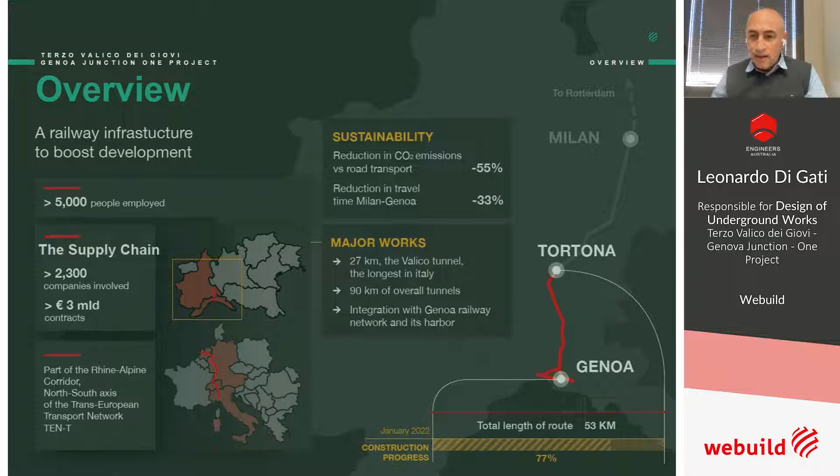So let's focus a bit more closely into the project. As I was saying before, Terzo Valico is a high-speed, high-capacity railway line. It's the one colored in red in the map on the right, on the bottom, and basically it's the last part, the last piece of a larger line, which goes all the way up from Italy to Switzerland, Germany, and finally Netherlands. This part of the railway line is 53 kilometers long, but it has been built mostly underground. You can count almost 90 kilometers of tunnels.

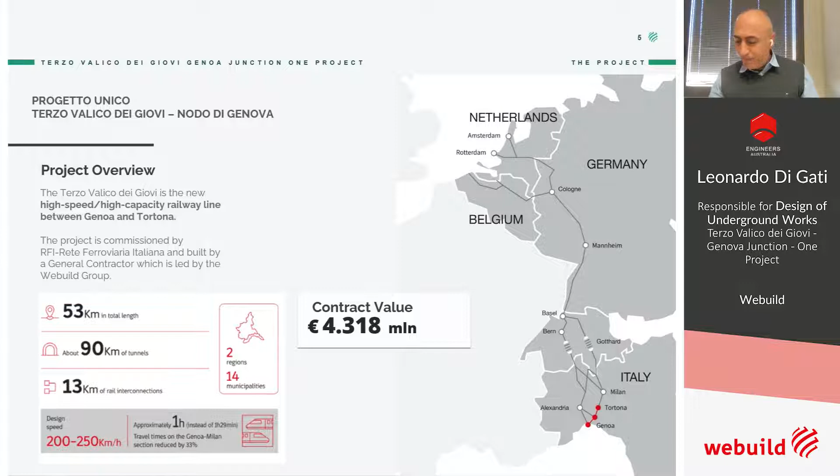Contract value 4.3 billion euro. As we will see, we are general contractor in terms of Webuild. And another important data is the design speed, which is, since it's also high velocity, is 250 kilometers per hour. That will mean that when the line is finished, one can reach Milan from Genoa in an hour. Today it's an hour and a half. So it's quite a saving of time.

This is the current route of goods that go from China and eastern countries to Northern Europe. What's basically happening today is that container ships, most of them, prefer to go the long way, all the way up to Rotterdam through the Gibraltar Channel, instead of going to Genoa. So they go all the way up, and then come down again by train to bring the goods to those countries. Which is quite strange, because it's a longer trip with 5 days of delay in travel time and a bigger cost.

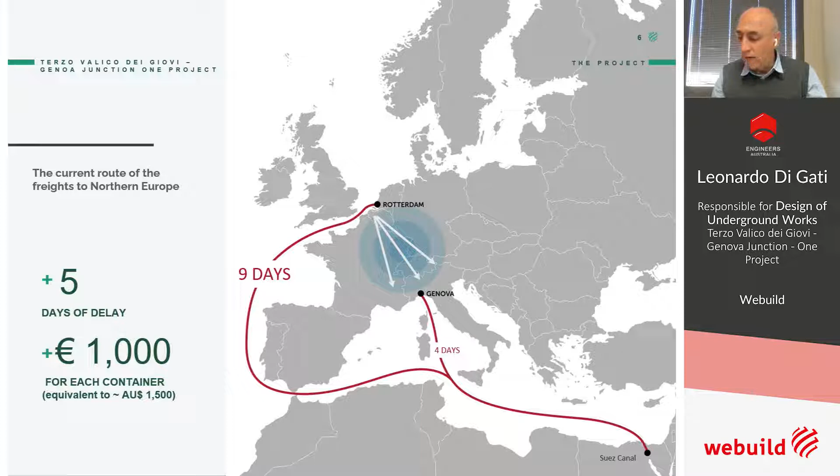It's still a pretty big port, one of the top 10 biggest ports in Europe, but it still has some limitations. This is why the Terzo Valico project is quite important. Also, because today most of the containers are loaded onto trucks and moved through roads, the idea is to transfer all of this onto trains.

The line is part of a larger system called the Rhine-Alpine corridor, one of the corridors of the TEN-T network. Completion of the line will have many benefits, of course, in terms of environment - a huge save in travel time and in CO2 emissions, compared to maritime transport, minus 70%.

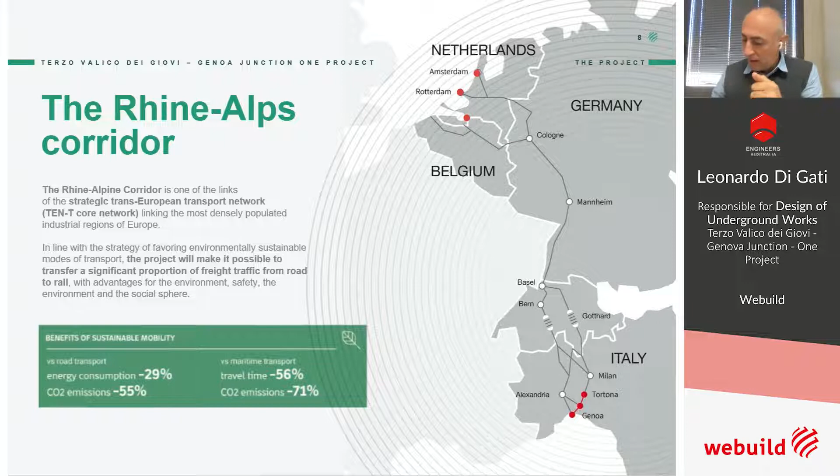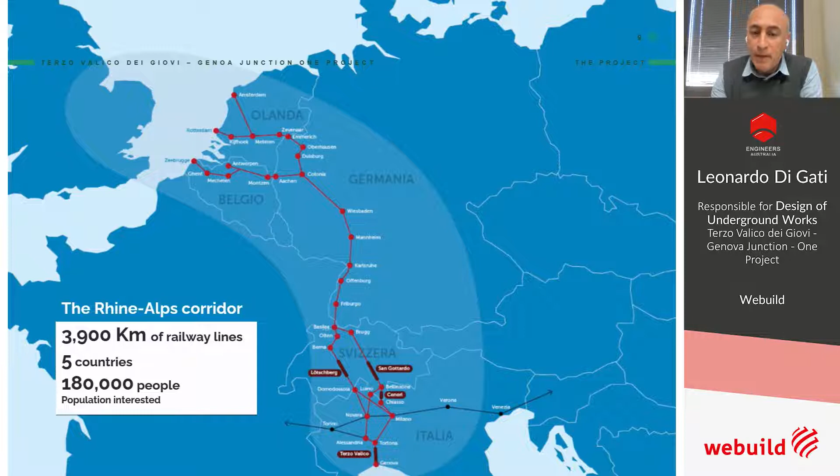This line is one of the most important in Europe. You have to consider that you have almost 4,000 kilometers of railway lines going across all those countries, which are in a very densely populated zone of Europe. Almost 180,000 people live in this area, and it's part of the whole corridor system, shown here in red.

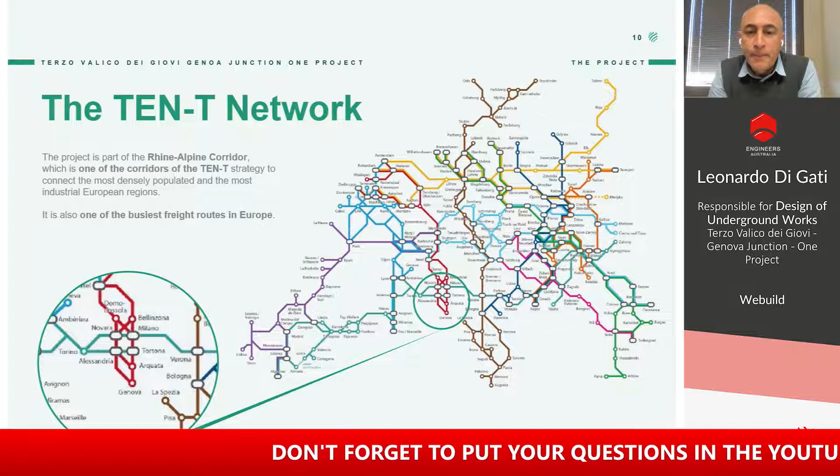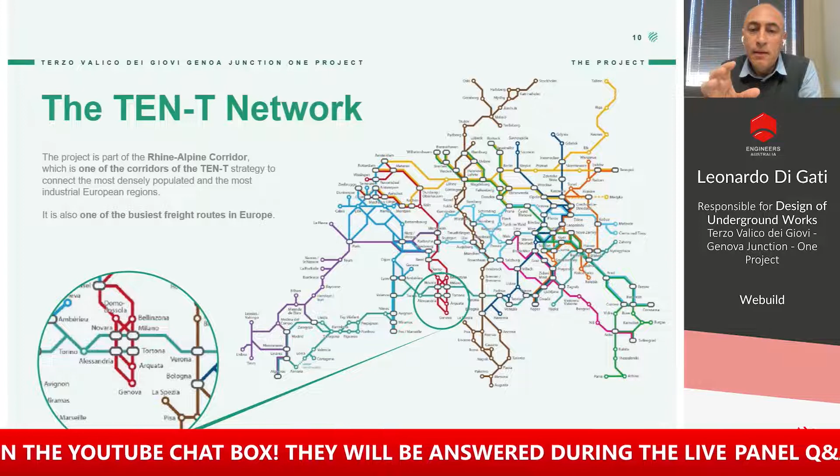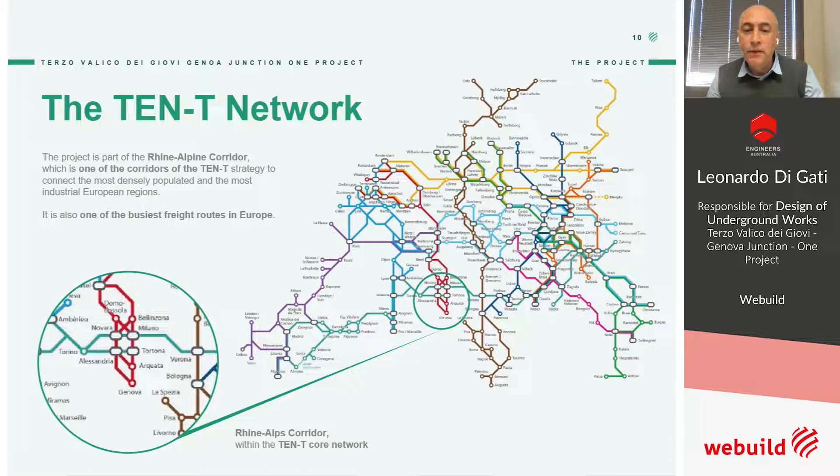You can see on the left, with the circle, where we are - one of the busiest areas in Europe. That's why it was considered among the priorities. The European Union defined 9 corridors as the so-called core network, with the target to complete them before 2030, and we are working on that.

A bit more about the project. As I said before, the project consists of 53 kilometers of new railway from Genoa to Tortona, with the possibility of switching on the northern side also in the direction of Turin. Most of the line is underground in the southern part - 37 kilometers underground - while the northern part, in the flat lands of Piemonte, runs mostly open air.

There are two major tunnels: Serravalle tunnel, which was completed, 7 kilometers, and a bigger one, Valico tunnel, 27 kilometers - actually the longest tunnel we are building in Italy. Because of that, the construction uses 4 adits, used to speed up the excavation, which will also be used later for emergency purposes and maintenance.

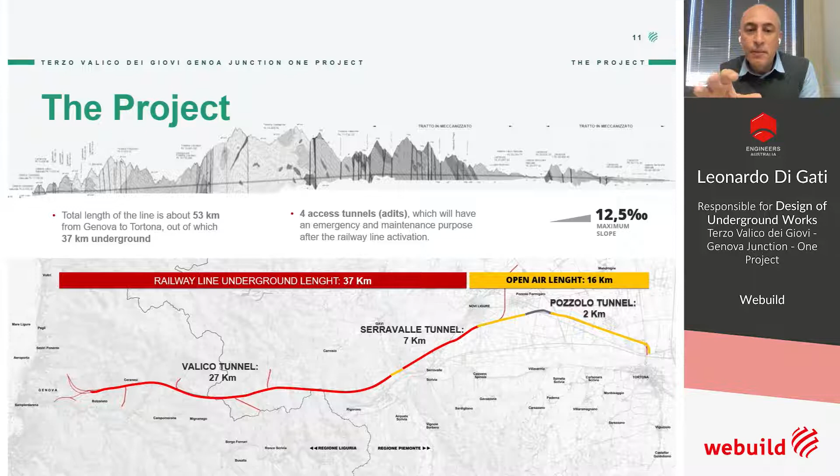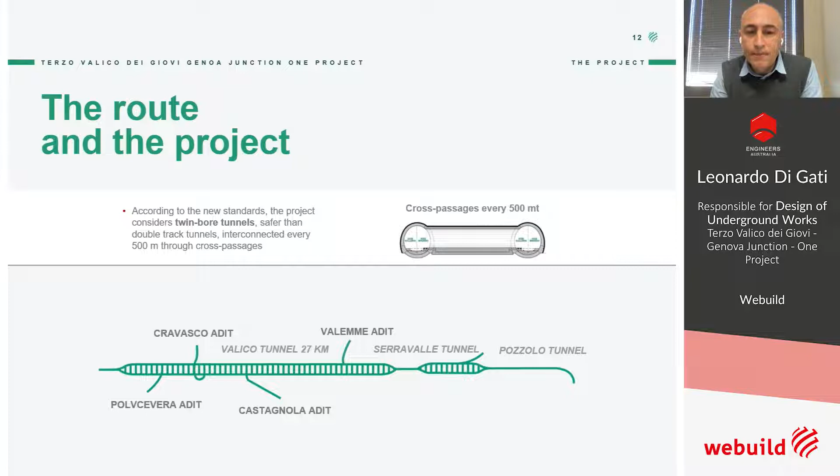You can see in this slide a sketch of the geological profile. In the middle part of the alignment, the overburden is about 600 meters in difficult rock. This is the layout of the tunnel - there are 2 twin tunnels spaced around 30 meters apart, running parallel, connected every 500 meters with cross passages. You can also see the location of the adits here.

A couple of words about Webuild, who we are. We are a global leader in large, complex infrastructures. We build basically all around the world, in 50 countries, and we have a lot of experience with challenging projects.

Now I will focus a bit more on how we have organized such a big work. It's a big work with 5,000 people working all around the job sites. In order to deal with that, we decided to build our own facilities, our own base camps, located from Genoa all the way north, along the whole alignment. They are like small cities, able to host from 200 to almost 500 people each.

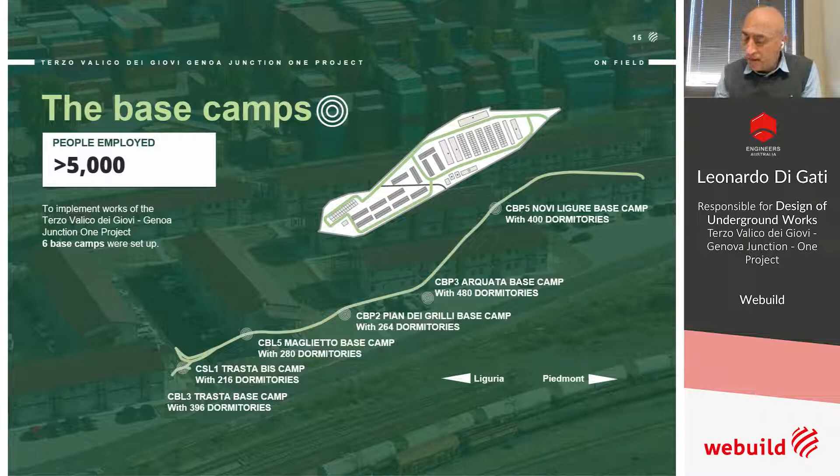Each base camp is fully organized and integrated with the surrounding territory, but it also has some degree of independence. Of course there are dorms, offices, a canteen, and also very important, an infirmary, so in case of emergency we can deal with that. Carmine will explain this better later on.

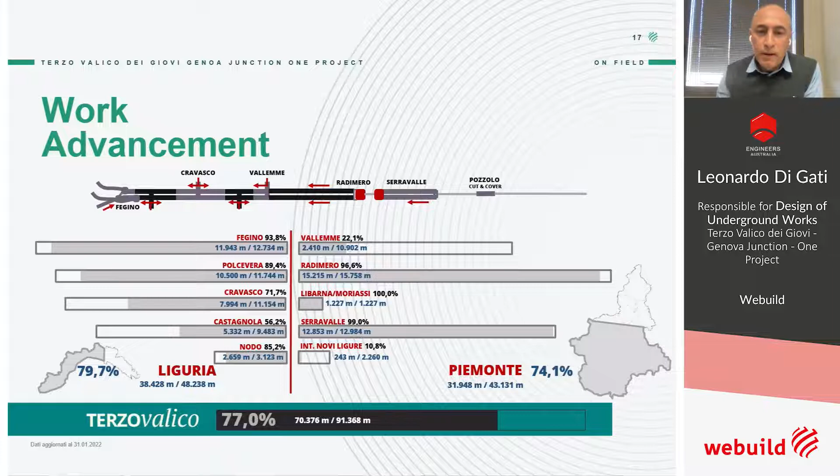Very quickly, we have already done 77% of the work, so we are going towards the end. As I said before, the Serravalle tunnel is completed today. We're excavating the Valico tunnel, which is the longest one.

This tunnel is excavated with two methods. Consider that 55 kilometers of tunnel in Terzo Valico are excavated with conventional excavation, whereas 35 kilometers are excavated with TBM excavation.

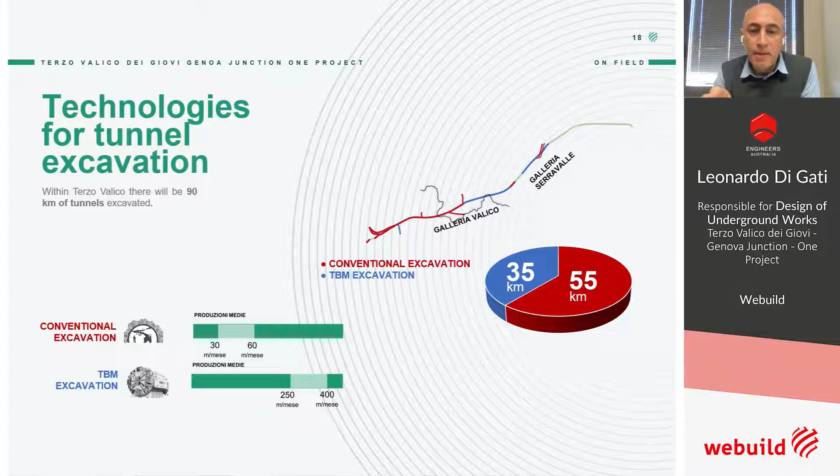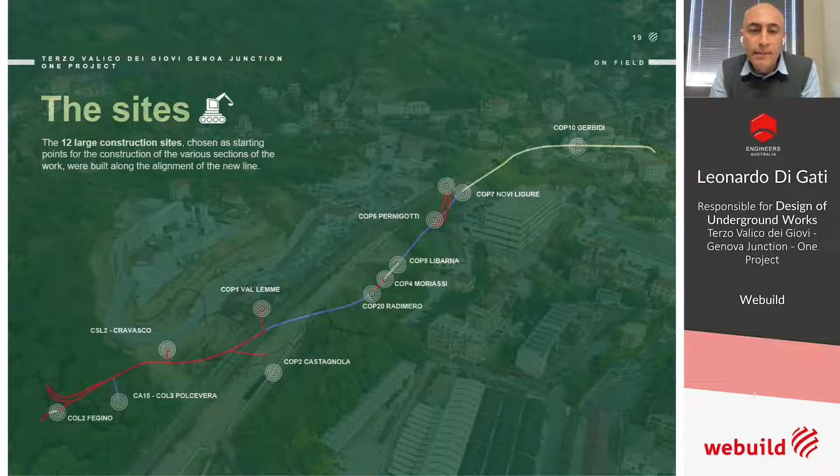Of course, one can ask why is that? I will explain it in a few seconds. Before that, let me show where all the job sites are located—there are 12 job sites along the alignment, and basically there is a big difference in terms of characteristics of those job sites.

If you go all the way down to Genoa, you will see that those job sites are mostly in an urban context. They are smaller, located in a very densely populated area.

And then, if you go to the central part of the project, you have totally different types of tunnels—mountain job sites. They are very, very small. It's pretty difficult to access these places, and the existing network is very, very small and limited.

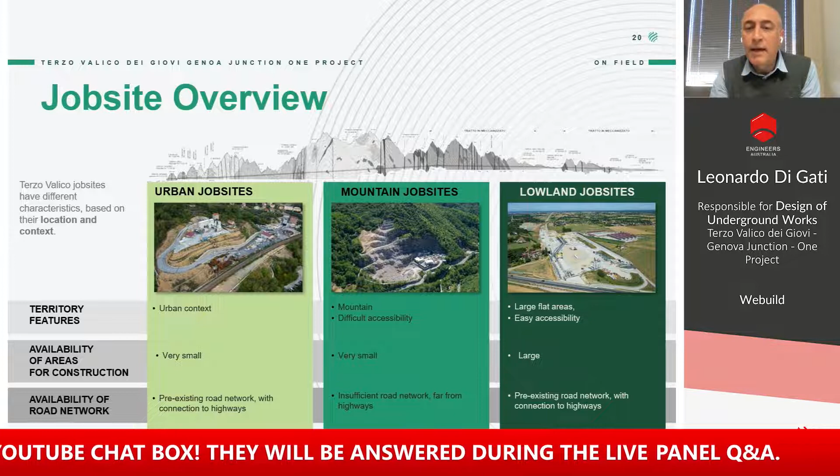And when we go north in Piemonte, it's another context again—large flat areas, very easy to have access to the roads, and much more availability of sites for managing the muck coming from the tunnels.

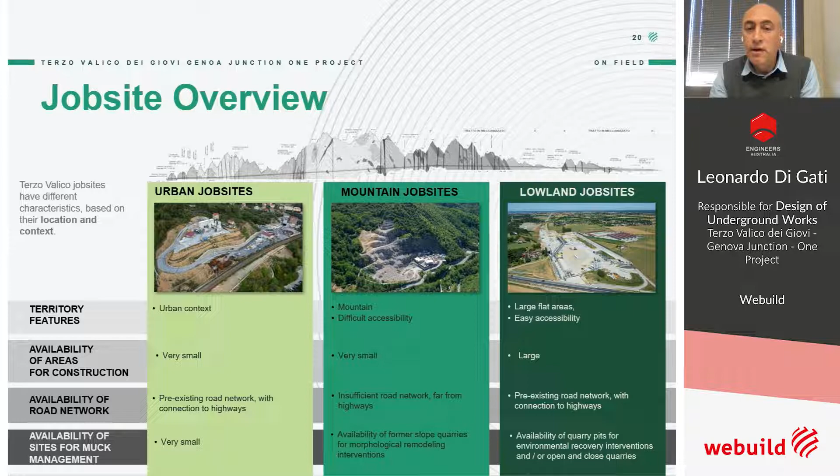So this context around the alignment, around the new line, played a major role in deciding and shaping the type of job site and the type of excavation that we could perform. In each area, we had to choose different techniques.

This is a photo close to Genoa—this is the Polcevera site. This site was equipped for conventional excavation. As you can see, the site is pretty well integrated into the surrounding area; you almost don't see it, but it's on the right. It's pretty small, considering the importance of the works and the number of kilometers of tunnel to be excavated.

In this situation, we normally used other areas as well, to facilitate and help with the management of muck, mainly, and also for other needs.

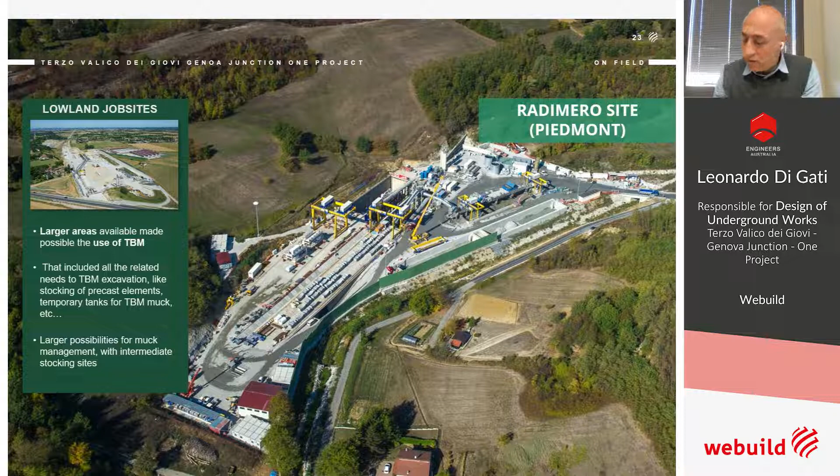So, if we want to answer the question from before, the choice of the proper technology to use for each job site is basically a sum of different factors. You have to consider, of course, the technical aspects, the geology.

It was mostly feasible—possible to excavate with TBM for sure in the north part, and it was more complicated in the central stretch of the project. The type of tunnels also plays a role, because in the southern part there are not only two tunnels but many connections, so it's more complicated to deal with TBMs.

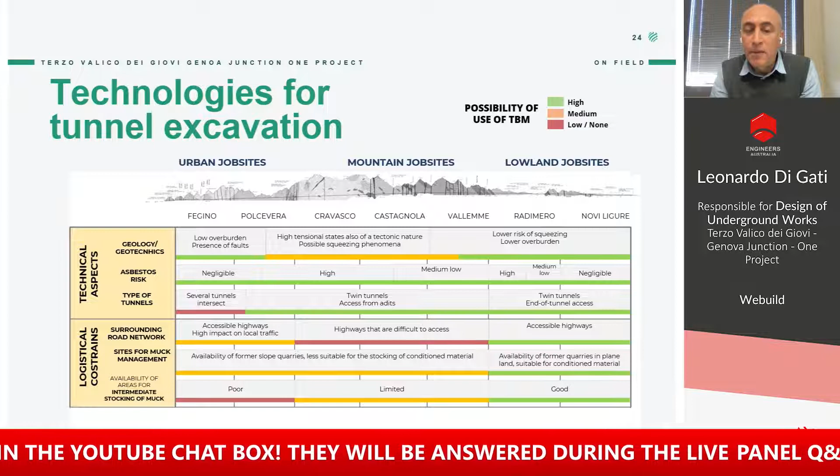But you also have to consider the logistical constraints around—the highways and the roads around the job site. In the central part, in the mountains, it was very complicated to implement a TBM tunnel. Also, the areas available for muck management were very small along most of the alignment, while we had a huge availability in the north part.

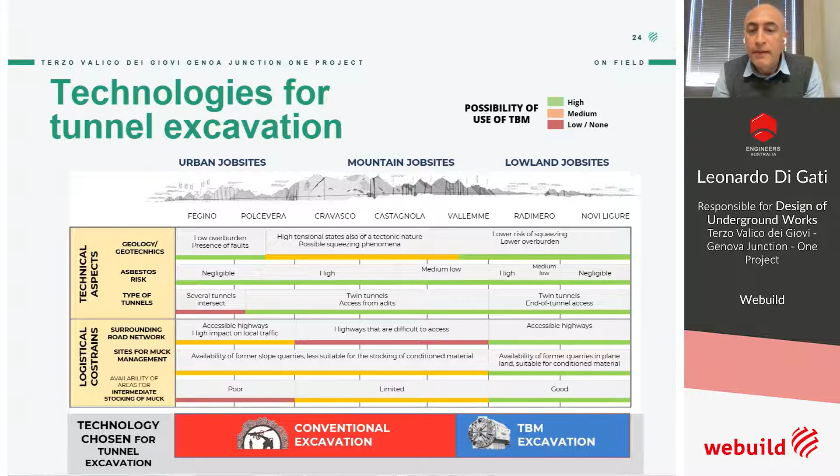So basically, in the end, we decided to use conventional excavation in the southern part and TBM excavation in the northern part.

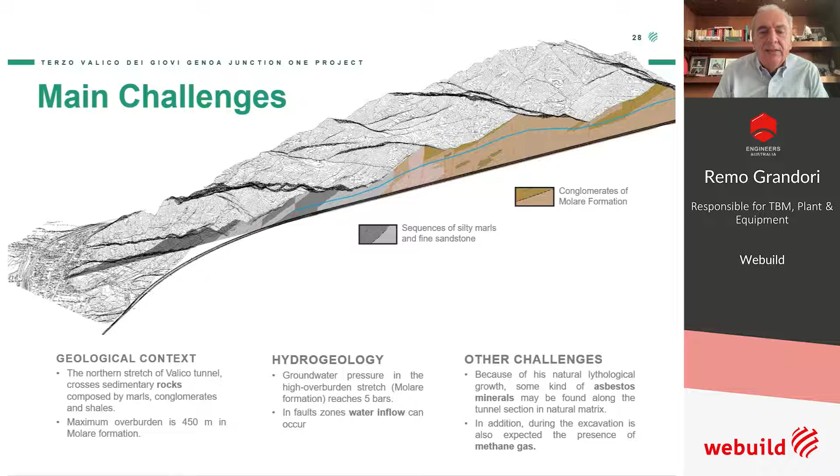The hydrogeology was also quite complex, because under such a high mountain we had high pressure and high flow of water, and also the presence of methane gas and asbestos minerals. So really, this project combined most of the difficulties and challenges you can have while boring a tunnel by TBM.

This is a geological section of the tunnel showing the probability of crossing asbestos formations. As you can see, there is a section of 4000 meters where the probability of asbestos formation was medium to high, but actually very high.

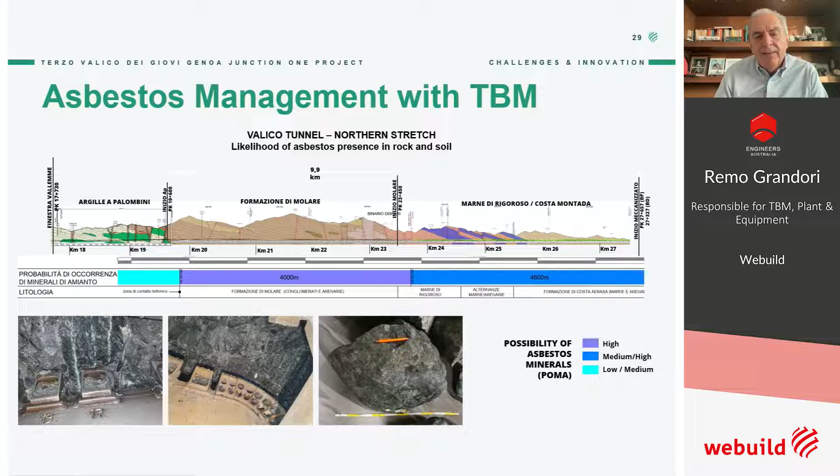So we were sure we would cross asbestos formation, and that's why we prepared the TBM in advance to manage it. We didn't consider this a risk, but a certainty — we knew we would encounter asbestos in this section.

In general, the TBM, and especially an EPB TBM, gives some advantage when dealing with asbestos formation, because an EPB TBM has a closed mode of operation, so the muck, at least inside the TBM shield, is confined in the excavation chamber and in the screw. This makes it relatively easy to create separate volumes inside the machine and inside the tunnel.

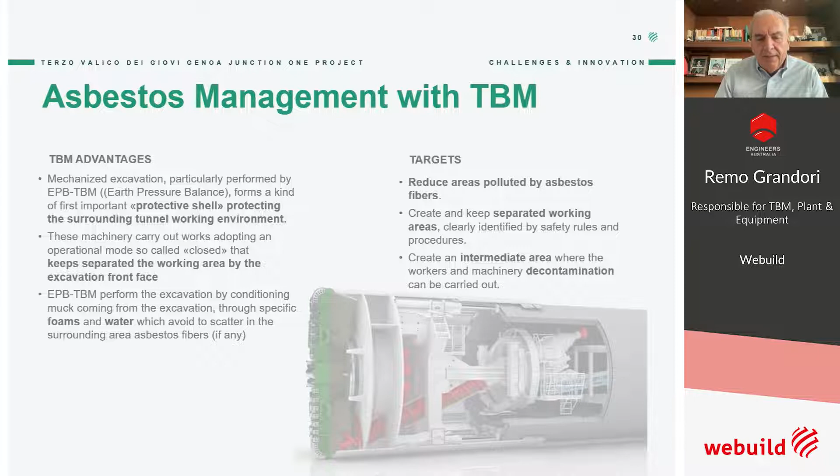That philosophy of creating separate space was used to develop the idea and design of the system. Basically, we considered a contaminated area that goes from the TBM up to nearby the portal, not exactly the portal, but in proximity to the portal of the tunnel.

So we have to say this was considered a contaminated area, but we did our best to ensure this area was not really contaminated, and we will see that after.

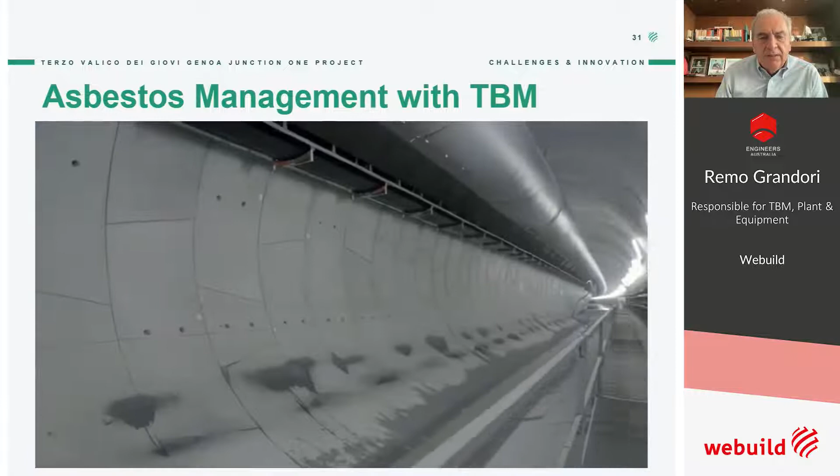Here we can see a small video on how we organized the site. You can see the outside installation, the pool — the muck pool — where we deposited the muck and tested it for the presence of asbestos, and this is the site from where the two machines crossing the asbestos formation were launched. This is the tunnel in the so-called contaminated area.

These are details of the segment installation, and details of the covering of the conveyor system outside, so as not to disperse fibers outside. All the external conveyors were covered.

This is in proximity of the portal, to separate the contaminated area from the outside area that has to be non-contaminated. We had a decontamination section. We can see now in area A, the contaminated area, the personnel was wearing full protective clothes and mask, so it was fully protected.

Although, as we can see afterward, we measure and succeed in avoiding the presence of fiber by confining the Muck, anyhow, since this was considered a contaminated area, we wanted people to be protected anyhow.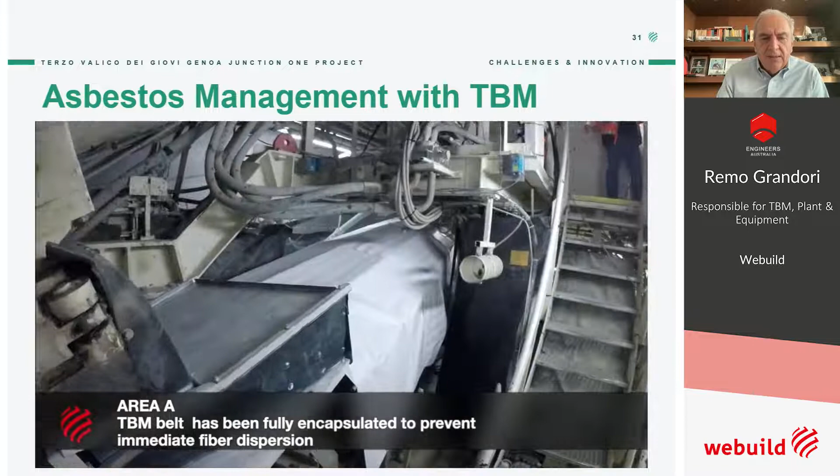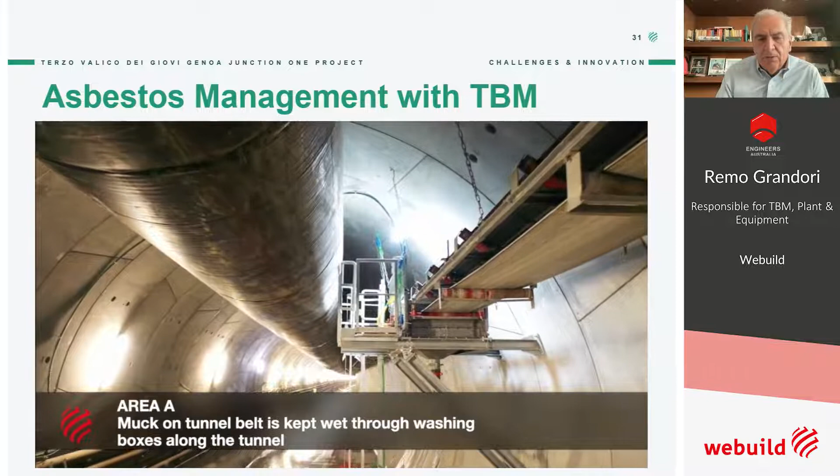You see that the belt, all the Muck transport system, was contained inside the TBM and backup, and along the tunnel, the Muck was kept humid by spray, and the return belt by wash box.

Anyhow, at the end of the contaminated area, there was area B, the decontamination area, where the people, the air, and the vehicles were decontaminated.

You can see some of the operation of the decontamination, and these are the filters that were filtering, decontaminating the air coming out of the tunnel from asbestos fibers. Here is the section where we wash the vehicles going out, the multi-service vehicle going out from the tunnel.

I think this is quite interesting, to see this detail of the measures we took to clean the cabin. And then this door opens, and the vehicle could run out of the tunnel.

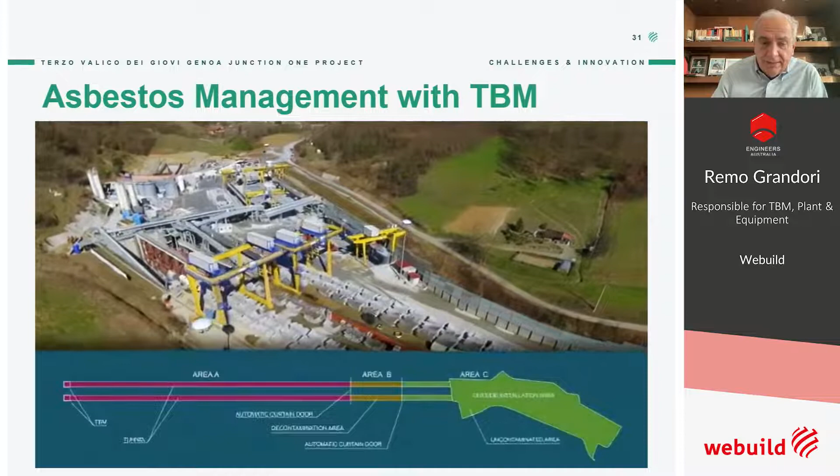There is area C, the non-contaminated area, all the outside space. This is very important, because what is inside the tunnel, you have to protect the worker from contamination; from what is outside the tunnel, you have to protect the environment from contamination. So these were the two targets we had, and I think we succeeded well.

Okay, still a detail of the conveyor system.

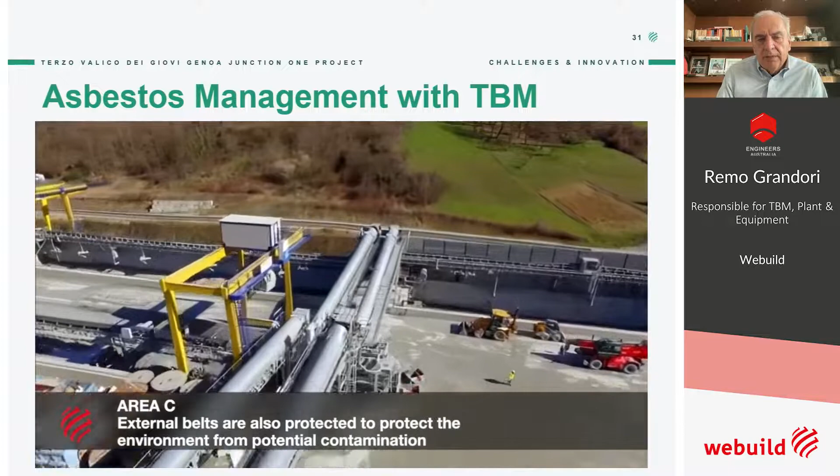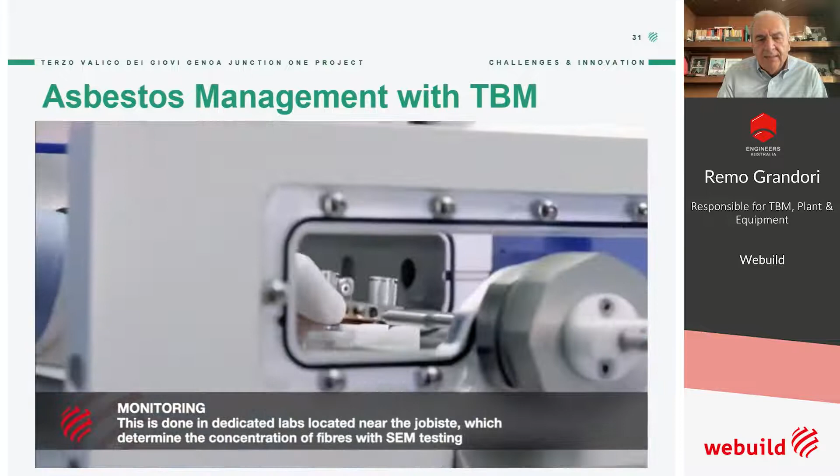The material outside was tested, and if asbestos found, okay. Now I think it's good to mention the monitoring system. We had a monitoring system continuously testing the presence of fiber in all three areas, on a 24-hour basis.

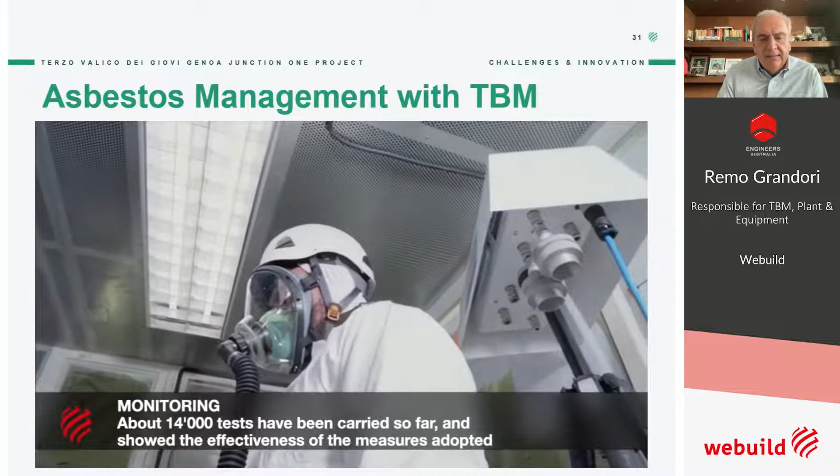We have several fibers tested with SEM, that is the more accurate method. We made 14,000 tests that gave us real confidence that we were doing the right work.

We were working properly. So this was done in cooperation, also in agreement with the union and with all the authorities taking care of quality, safety, and health in public authorities in Italy.

Okay, that's, I think, very interesting, this video.

Now we come to the result. We had 14 stations to measure the presence of fibers inside the TBM, in the B area, in the decontamination area, and in the outside area, in the non-contaminated area.

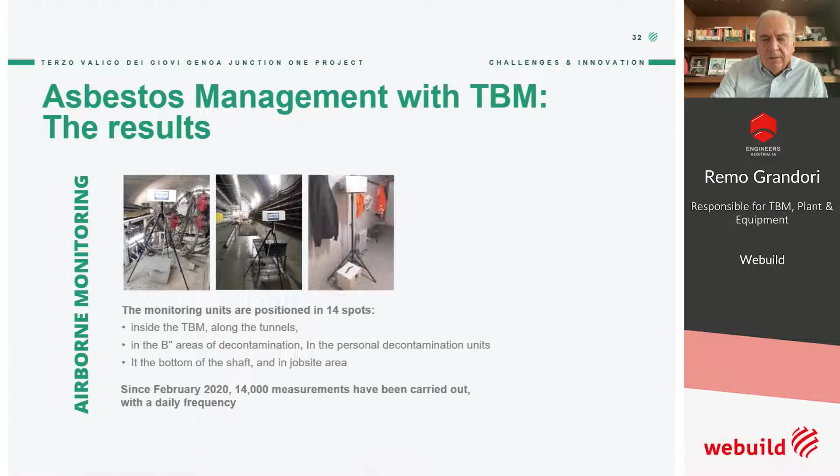14,000 measurements were done. We can see some of these stations. Then the results were this. This is, I think, quite important to see.

So the limit given by the norm in Italy is that in the decontaminated area we cannot exceed 2 fibers per liter, while in the working area, contaminated, where the people wear protective clothes, we can go up to 100 fibers per liter.

Our results show that in all the areas, for 98.8% of the time, we were below, and most of the time much below, the 2 fiber per liter limit. So basically, for 98.8%, even the theoretically contaminated area was actually non-contaminated.

Only in a very limited case, in area A, the contaminated area, we measured slightly more fiber than what is allowed in the decontaminated area. So in short, by the measures we took, we managed to keep a decontaminated condition for 98.8% everywhere.

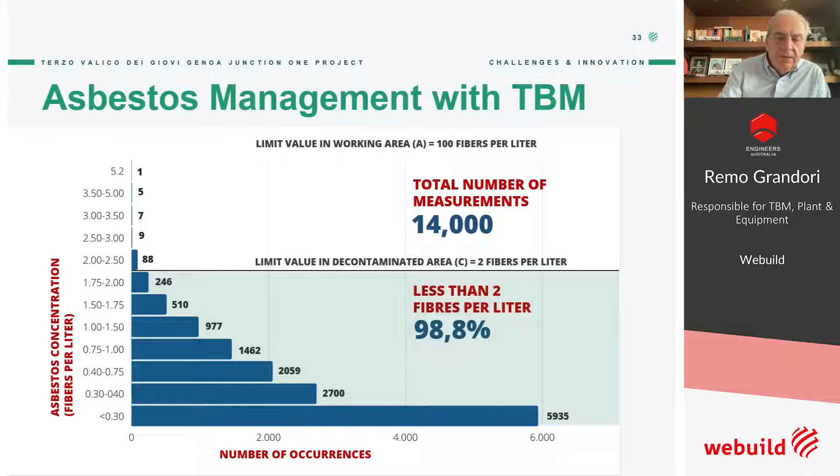The Muck is another, let's say, the last problem: what to do with the contaminated Muck. In Italy, the norms and legislation are quite strict. So let's say the normal Muck was...

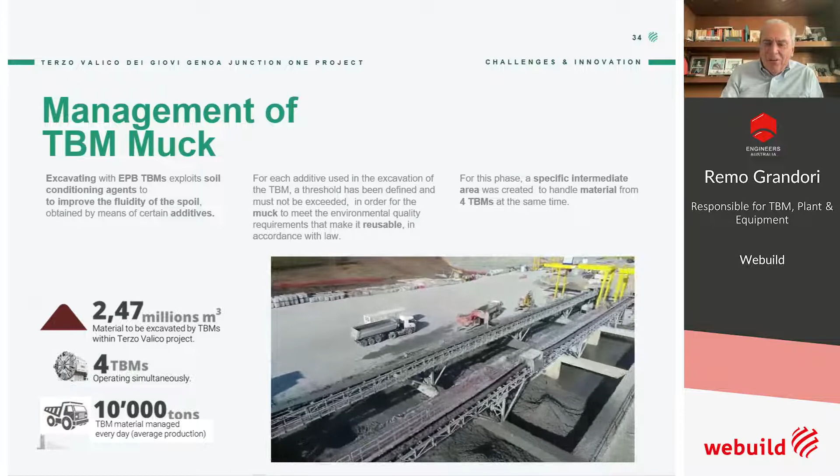loaded on truck after being tested. And again, for the management of the TBM material, we have two separate corridors: one for the non-contaminated Muck, which was not contaminated by asbestos but contained foams for the conditioning of the EPB. The Muck was taken from the Muck pool and loaded on truck.

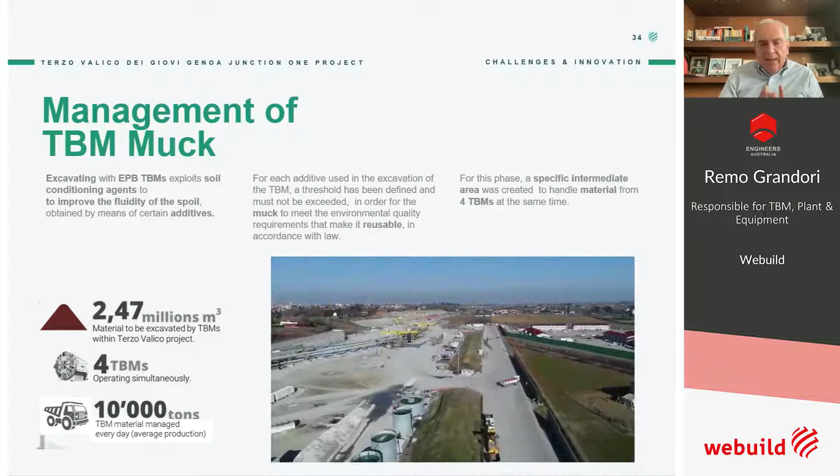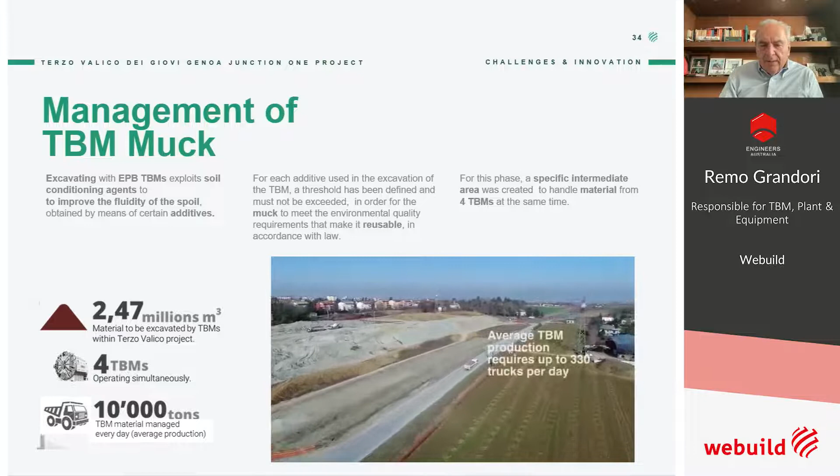We built a dedicated road to transport with trucks the muck containing foaming material conditioning agent to a very large intermediate deposit, the Romanellotta deposit, where the muck was stored in stockpiles, each pile for 1 day of production and only 1 meter high.

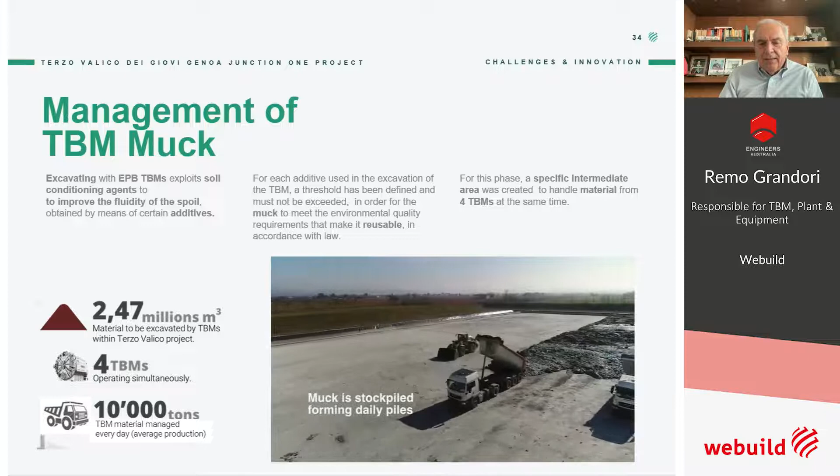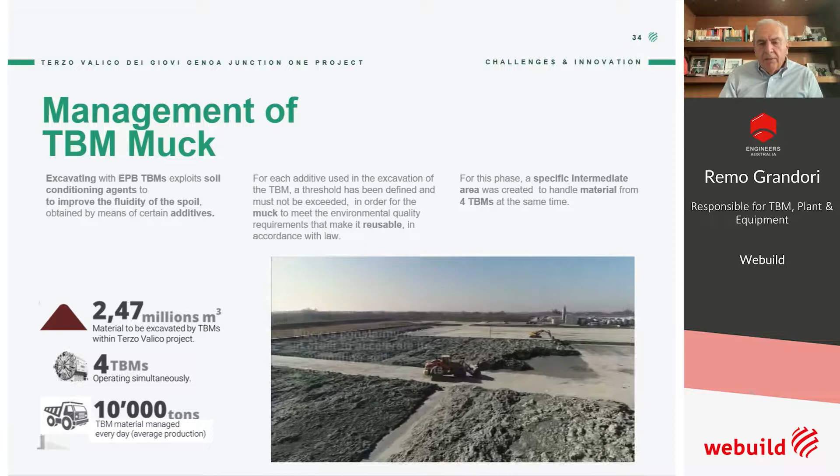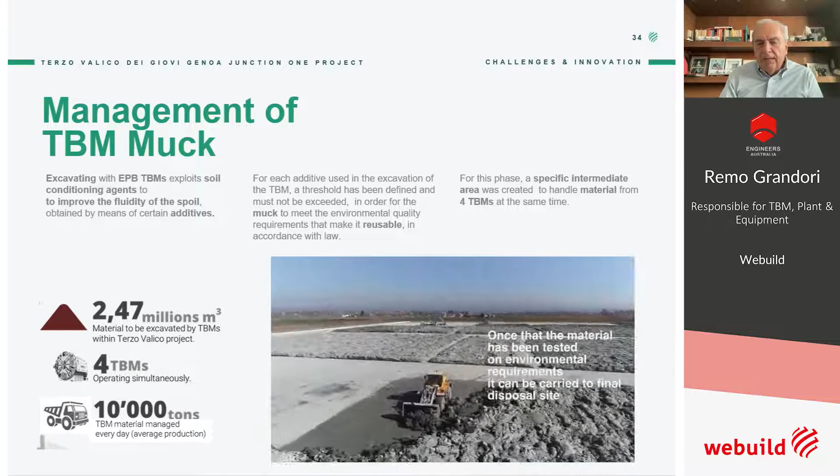This was done in order to facilitate the biodegradation of the material, and it was quite successful, because after an average of 7 to 10 days, depending on the season, we measured that the muck was decontaminated from the foam and could be transported to the final muck disposal area. You can see this was quite an expensive operation, but quite successful.

On the other side, although it's not in the video, the contaminated muck by asbestos was contained in special big bags and transported inside the big bags to a special deposit in the northern part of Italy.

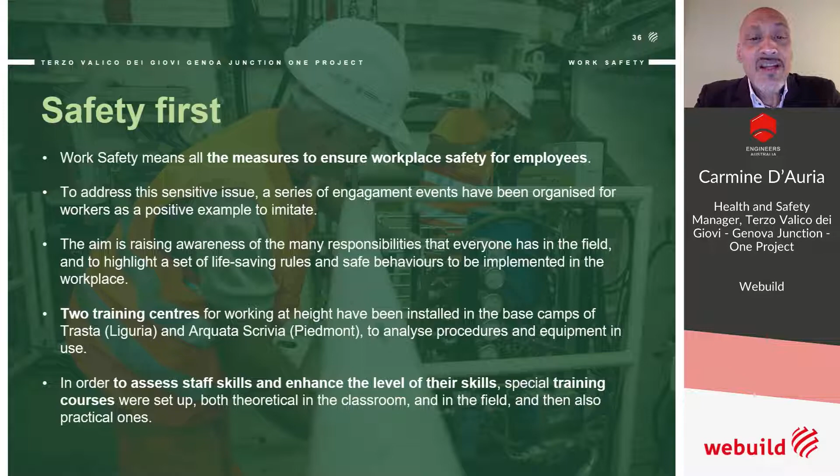Worker safety is the main goal in our project. We put our effort into giving workers positive examples to imitate and into raising awareness of the many responsibilities that everyone has in the field. To achieve this goal, we organize special training courses, both theoretical and practical.

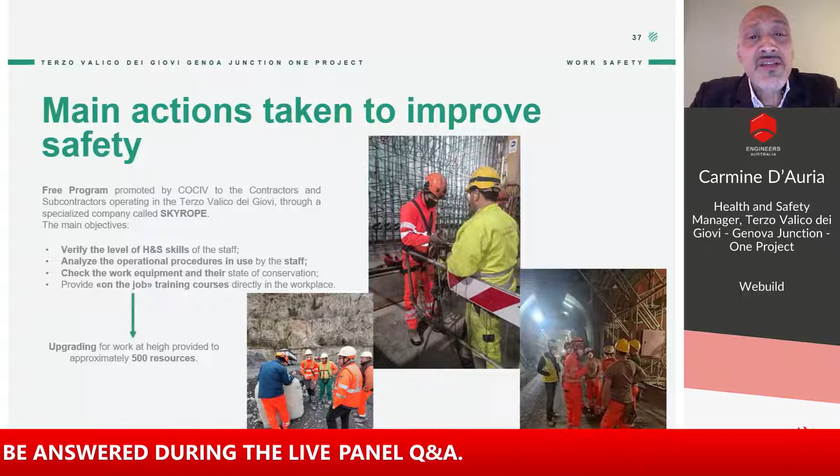One of the main actions was to spread our safety culture among our subcontractors who participate in the project. We have changed the classic approach based on vigilance and punishment, and decided to listen to workers and share with them possible safety solutions to improve their working conditions. As a consequence, we introduced the training on the job project to empower workers' skills directly at their workplaces.

The Webuild Safely program has allowed the project to keep going during the COVID-19 pandemic. The program was based on the self-search for positive cases of the virus, using antigenic and molecular swabs. Moreover, the project provided dedicated accommodation to guarantee isolation in the base camps and advertised a vaccine campaign directly in the infirmaries. The Webuild Safely program has allowed the entire project to keep infection under control among employees and subcontractors, and to break the chains of contagion.

Let's move on to another great challenge faced on our sites: excavation with traditional methods in rocks containing asbestos in a mineral matrix. During the excavation of the Cravasco adit, a very complex geological formation was encountered at kilometer 0.660. In this case, the consortium adopted an innovative organization of the tunnel excavation aimed at preserving the health of the workers and the external environment.

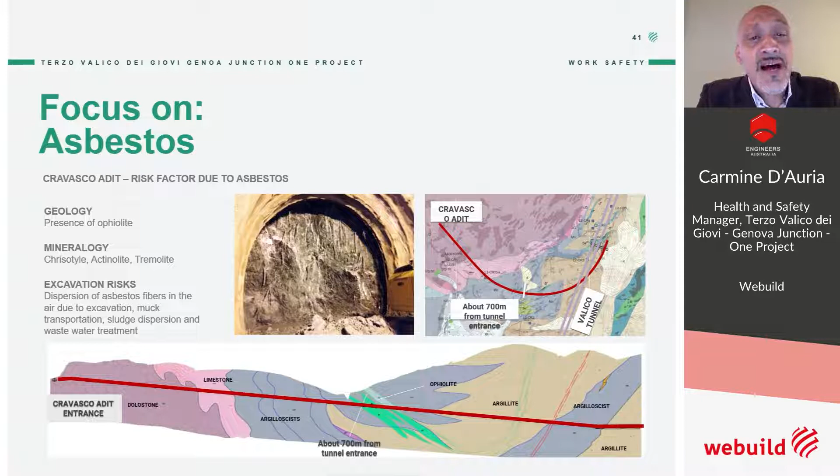As everyone knows, exposure to asbestos fibers can cause serious risk of mesothelioma and lung cancer. The risk of developing this disease depends on the concentration of asbestos fibers in the air and the time of exposure. Through breathing, these microscopic asbestos fibers are introduced into the lungs and alveoli, with the possibility of developing these terrible pathologies. Unfortunately, the spreading of asbestos fibers in the air is not just linked to rock abatement, but also to the subsequent lifting of dust due to the drying of the mud, or to fibers contained in the water used for the abatement.

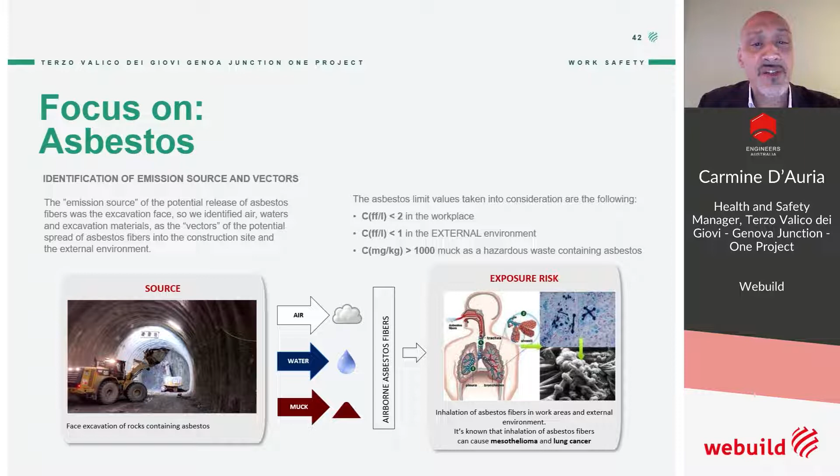One of the main solutions was to adopt an extraction ventilation system together with an HEPA filter capable of purifying the air up to 99.96%. The extraction ventilation system makes it possible to invert the airflow introduced into the tunnel, creating an airflow that enters from the tunnel entrance, runs through the entire tunnel, reaches the excavation face, and is sucked up by the rigid pipe in the excavation face. Through the rigid pipe, air reaches the HEPA filters and is finally released, purified, into the atmosphere outside the tunnel.

The heart of this system is represented by the extraction ventilation system. It consists of two fans of 200 kW each and a complex set of filters which together guarantee the extraction of about 60 cubic meters per second of air. The filter system is self-regenerating and is capable of carrying out backwashing.

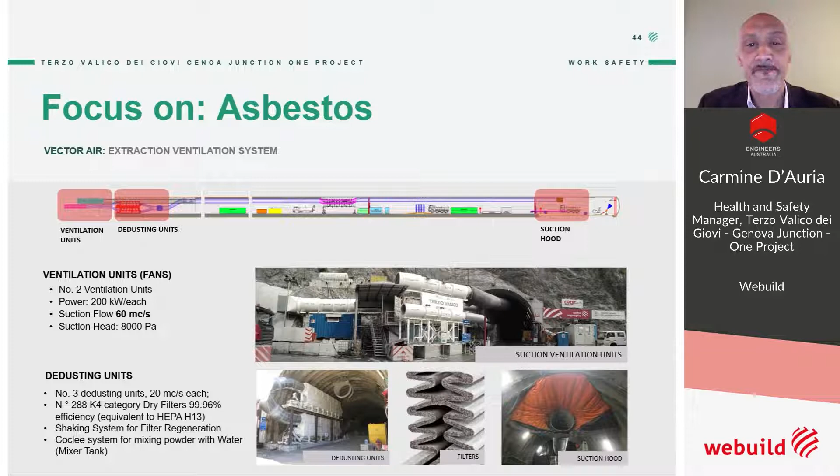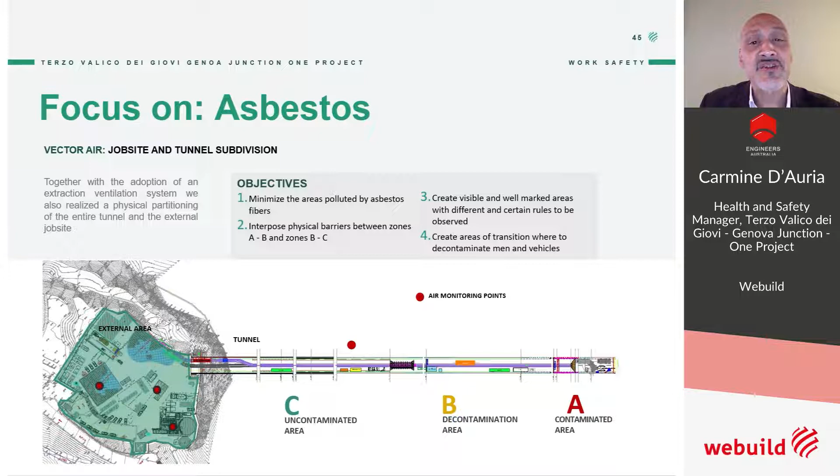The number of people present in zone A is limited to 3, with rotation every 4 hours in order to withstand the severe conditions imposed by personal protective equipment.

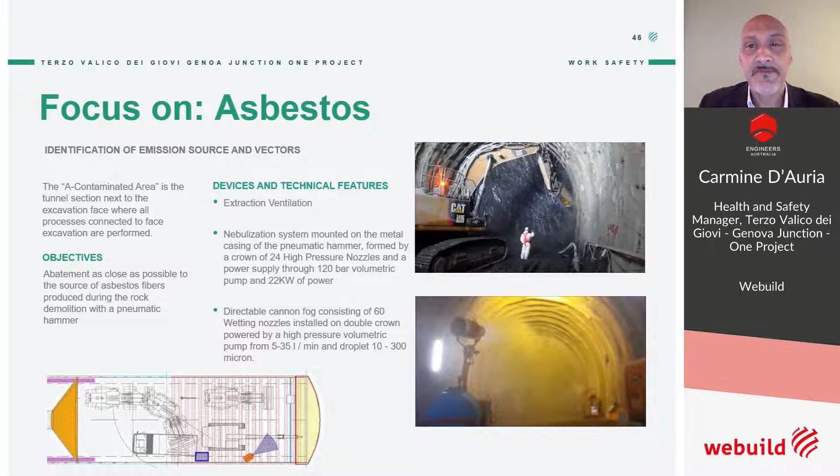In zone B, it is only possible to carry out the decontamination operations of workers and vehicles.

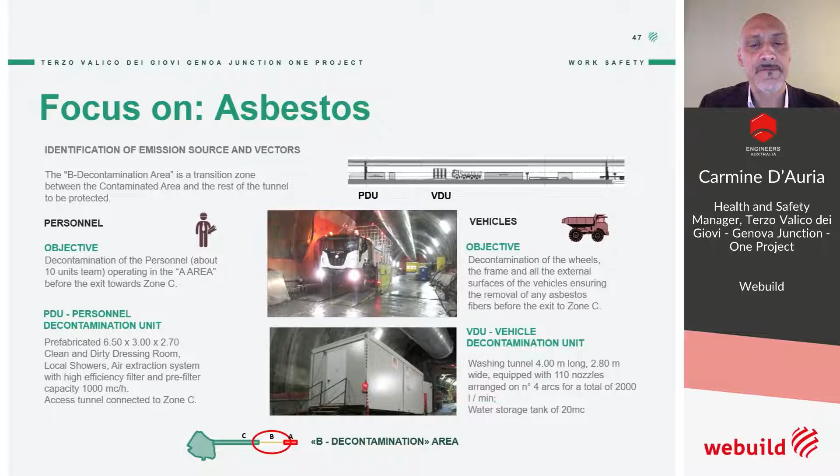Here we can see the physical barriers equipped with sliding guillotine doors.

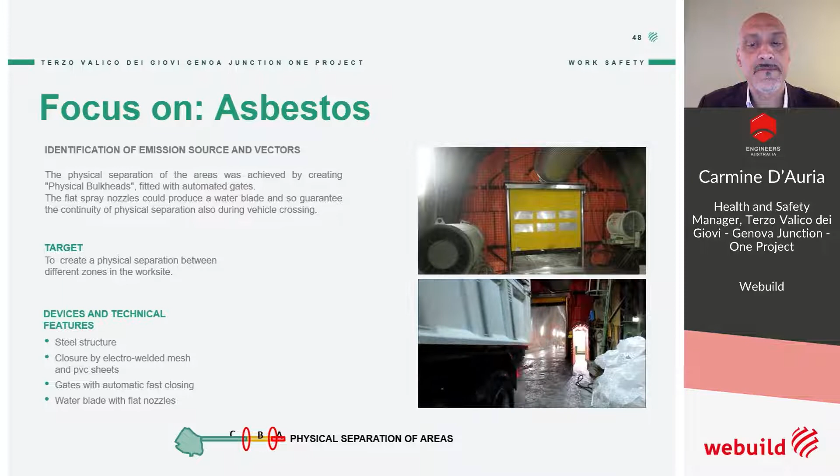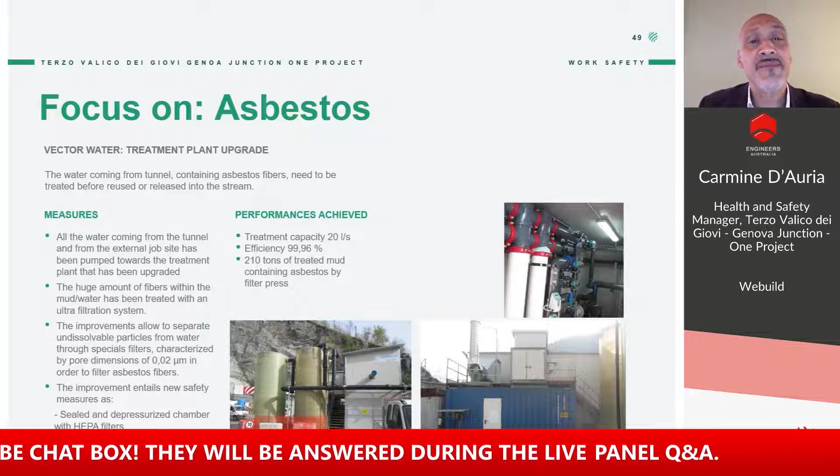The water purification plant, set on the external yard, guaranteed through ultrafiltration the removal of asbestos fibers contained in the water. The filtration and purification of water was one of the key elements for the success of the operation. In fact, all the water coming from the tunnel, once purified through the ultrafiltration mechanism, could be reused for the abatement of dust during excavation.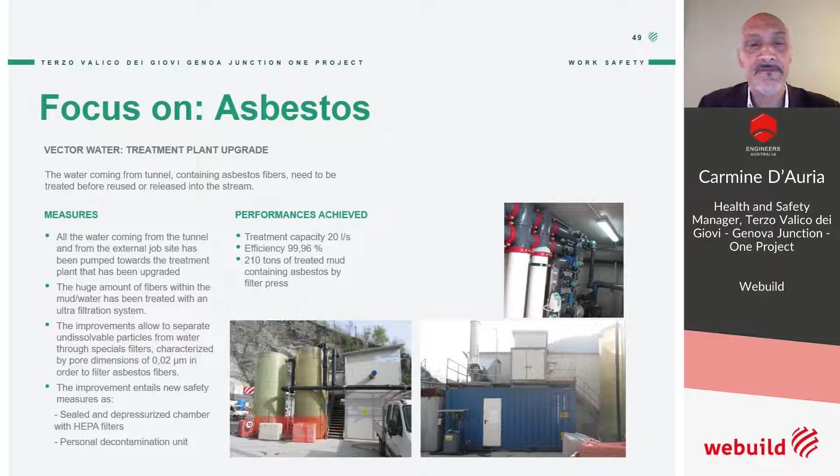The excavated material was treated as waste containing asbestos if it had a concentration above 1000 mg per kilo, and as a byproduct if it had less than 1000. In the first case, automatic bagging was carried out inside a structure mounted in the external yard. In this structure, the rock was further crushed and loaded into bags with a volume of 1 cubic meter, which were loaded onto trucks to be transported to authorized landfills.

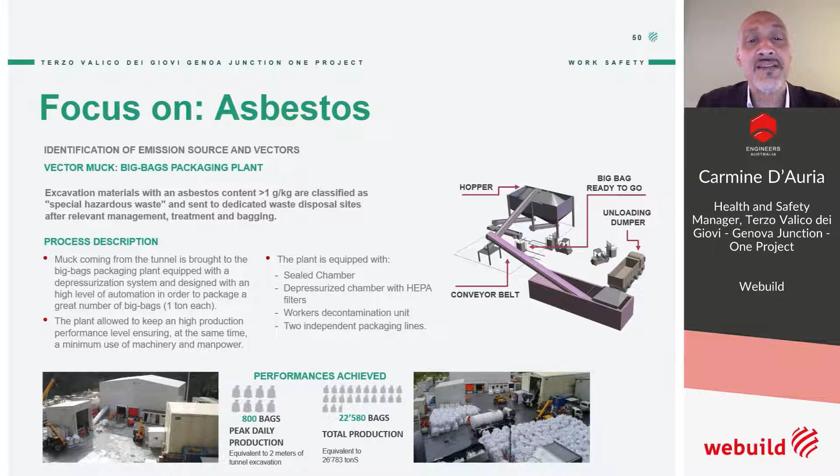Personal protective equipment included electro-respirators equipped with an absolute HEPA filter connected to a full face mask that makes breathing easy, safety boots, gloves, high visibility braces, and Tyvek overalls, which had to be thrown away at every exit from the tunnel to prevent the spread of asbestos fibers to other places.

As we can see from the graph, in zone A, with the histograms in red, we find quite high concentrations of fibers, while in zone B, the decontamination area, we find low values. In zone C, we find values close to zero, or in any case lower than 1 fiber per liter.

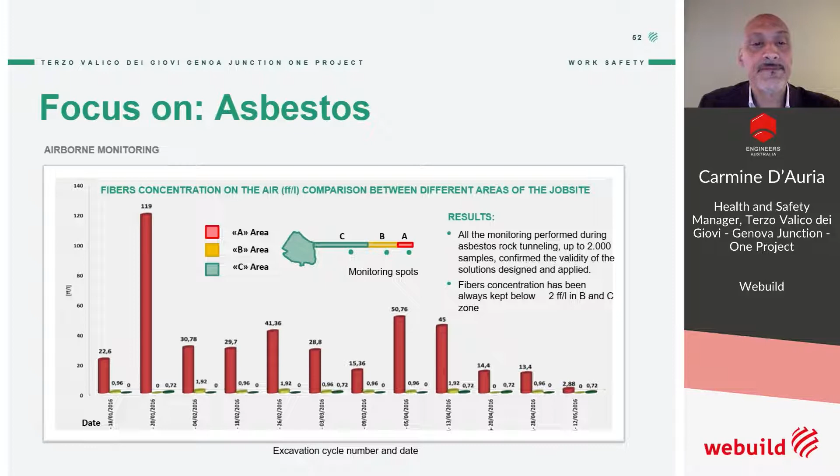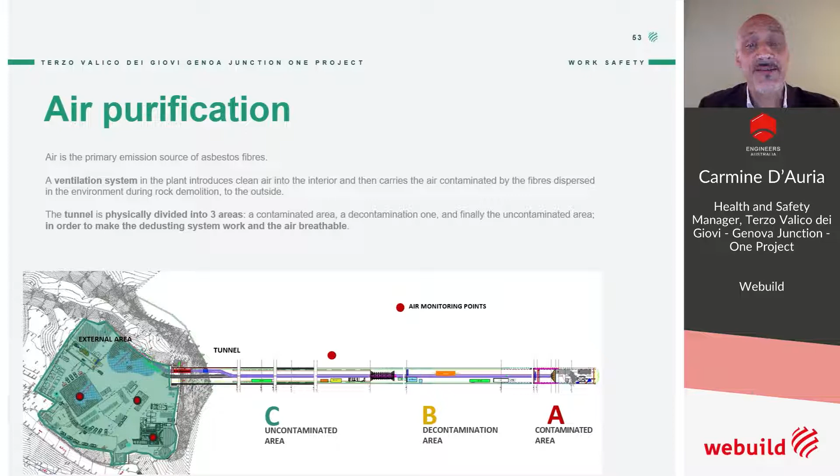Here we can see the monitoring points that allowed us to keep under control, every day during each excavation, the concentration of asbestos fibers in each work area. We invest in the development of safety.

Other safety actions that have been undertaken to improve safety are the semi-automatic steel ribs, which allowed activities in the excavation phase to be carried out in the absence of people. In fact, it is known that the most serious accidents, due to small releases or collapses of rocky portions, can occur at this point of the tunnel.

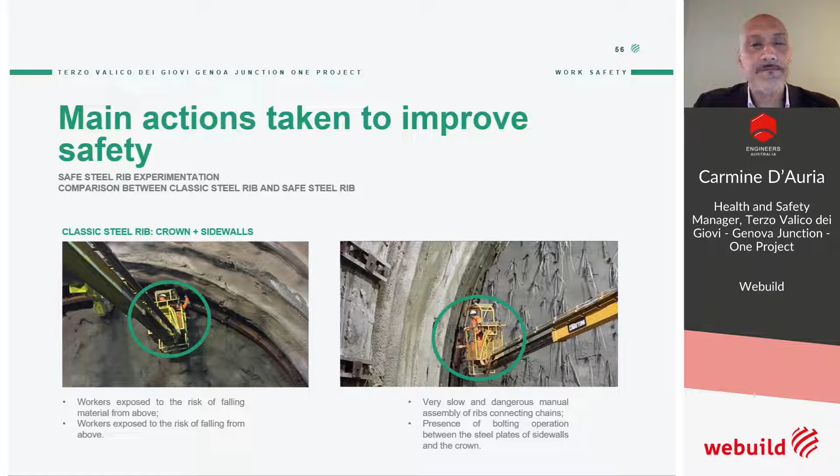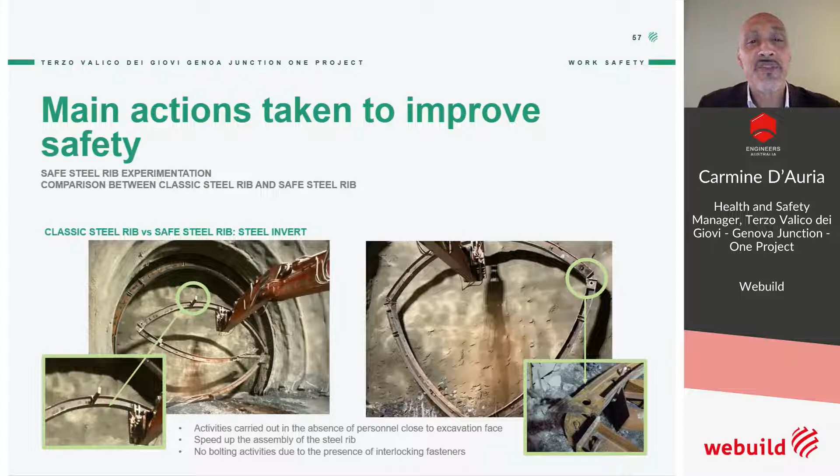Therefore, the operations that previously took place as represented in these pictures can now be performed with semi-automatic steel ribs, in the absence of people directly exposed to rock collapses. The same can be said for steel inverts, which can be mounted with a special device attached to an excavator.

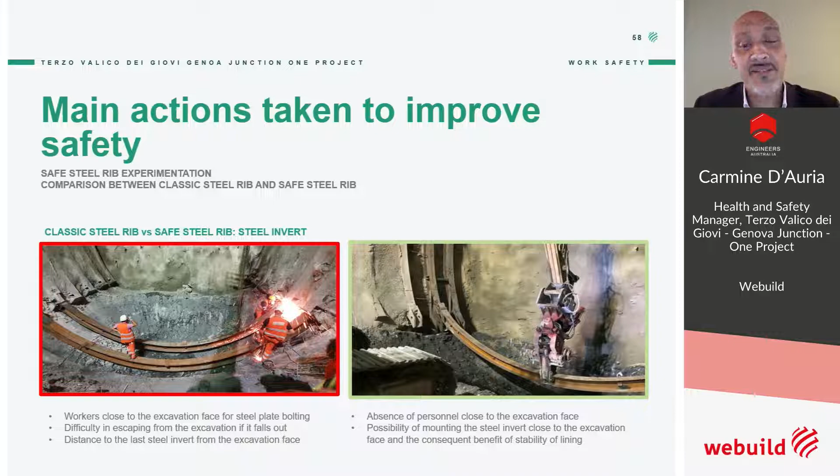The organization of the emergency response is another highlight of the Terzo Valico dei Giovi project. The challenge of emergency operations was to face a 53 km construction site, mostly in tunnels, with a hostile and difficult environment, including methane and asbestos.

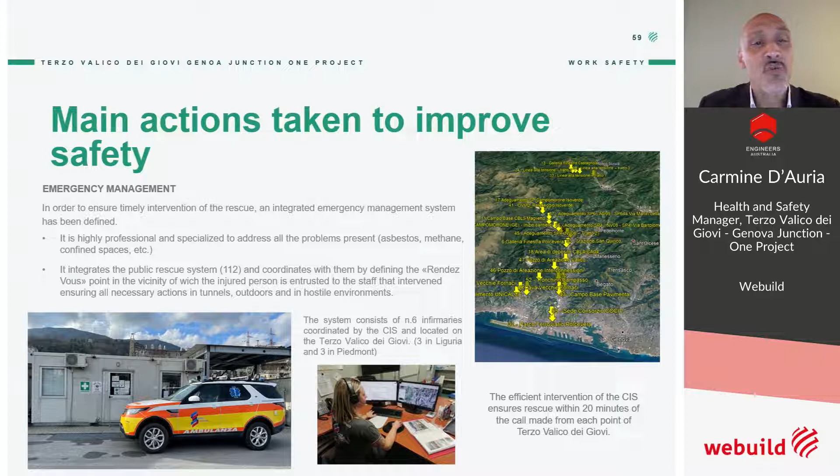For this reason, a rescue system called CIS was created, consisting of an operation center that collects emergency calls, with 6 infirmaries each equipped with an off-road rescue car, capable of reaching all the working places within 20 minutes from the emergency call. Thanks for your attention.